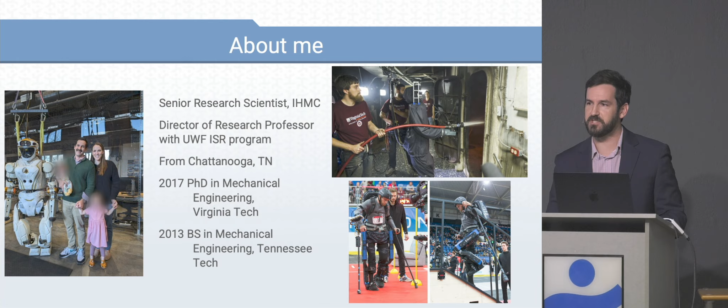And to go from that to where we're talking about today with humanoid robots doing commercialization, potentially being applied in all sorts of different ways throughout society - it's been really interesting to be able to do that, and so I think that gives me a little bit of a unique perspective to talk about some of these things.

But before I get going much further, I do also want to recognize one of the other excellent things about working at IHMC is the team that I get to work with. It's an honor to get to come to work every day and work alongside people that work incredibly hard, are really dedicated, and I get to take the spotlight in situations like this, so I want to make sure to give a little bit of that to them, because without them, none of the work that we do would be possible, and they also make being able to come to work every day fun.

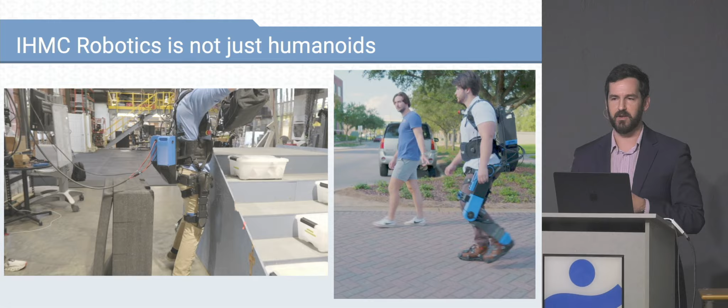It's also good to note, we do a lot of things in the robotics lab that aren't humanoids. So we do exoskeletons as well, we do drones, human-machine teaming, even quadrupeds. You're not really going to get to see very much of that today, but you can look at our YouTube channel, or come to our open house in April if you want to see more of these things in person and maybe interact with some of them.

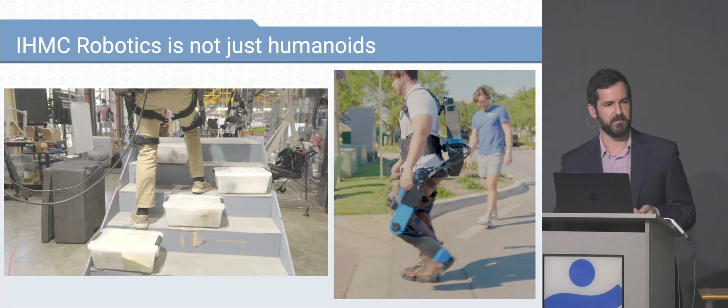But today we're really here to talk about humanoids. And for me, a lot of it is what is the motivating factor? It's that the robots that we have today, in a lot of cases that are actually deployed, just don't work in complex environments.

If I talk about different applications like emergency response, even soldiers, or even just manipulating operating panels, there's a lot of mobility challenges and other challenges for these robots to get there. They simply can't operate in these terrains, and that really limits their total application.

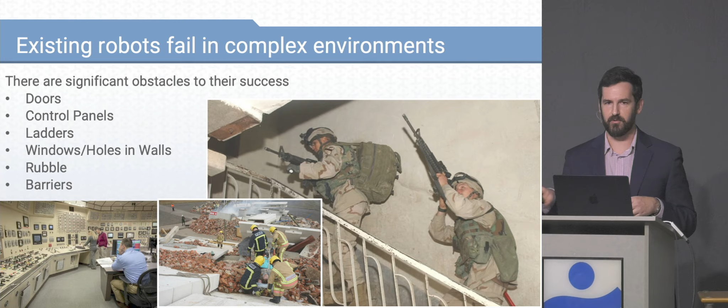And if I think about some of these obstacles, it's things like doors, control panels, ladders. A lot of these robots are built to do one or two things. Amazon warehouse robots are a great example of that - they can drive around the floor, and they do that very well, but they just don't scale to a lot of these other applications.

And that is really why humanoids. We have humans doing all of these tasks, and I want a robot that can go where people go and do what people do. And in a lot of cases, that necessitates a robot that looks somewhat like a person. The world that we've built is designed for people, by people.

A great example of that is the fact that the Americans with Disabilities Act exists. The ability for people that are wheelchair bound to be able to get around is only possible because we have the ADA, and even then it's still very limited as to the type of places they can reach. There's a lot of issues with this access that continue to be a problem, despite the great efforts we've made. So if I think about trying to extend robots into environments that are designed historically just for people, and have only been accessed by people, it's going to be a real challenge if I'm trying to take a traditional platform to do that.

We can highlight that simply by comparing. So we have our robot here on the left, Alex. Next to that we have a quadruped, Spot, made by Boston Dynamics. Then you have the robot you walked by on your way into the room here, T-Bot. And then there's the PackBot that gained popularity - one of the first mobile robots that made it out there.

If I look at these different platforms, talking about squeezing between a narrow space, a pretty big humanoid can do that because it can turn sideways. You're skinny where you need to be. But a quadruped needs to be pretty small, hip width. Your wheeled base and track base have to be quite small - it's really that width that limits them.

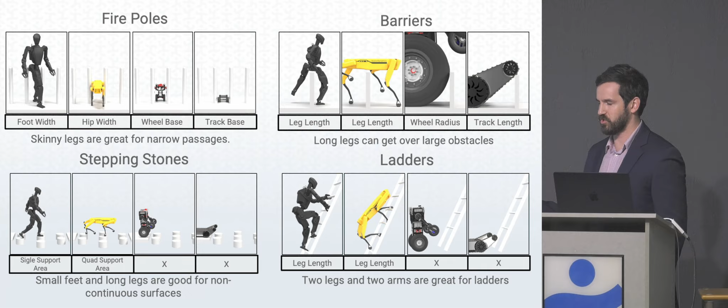But then there's some things you simply can't do with a wheel or track-based system - things like stepping stones or climbing ladders. You just can't do that. So if I want a robot that can go into a place that has that as a challenge, I really need something with legs.

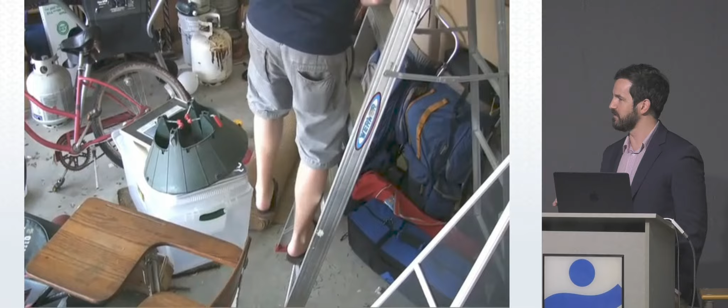I can take a video that was filmed in my former colleague's garage - we like to say this is like a disaster zone. You can see if I want someone to go in there and get an object out, he's squeezed between tight places, takes a big step over - never mind he's wearing flip-flops, that's probably questionable safety. He steps across, goes over a carpet, all to get a tennis racket.

While this may be a pretty trivial example, you can imagine a quadruped probably couldn't do this. I know a wheeled or tracked robot couldn't. Maybe I could fly a drone in, but that's going to be limited by however much it can lift, which isn't a whole lot. So you can see why, if I have these hard-to-reach places, I probably want something like a humanoid.

Now we can look back as to what funding got us to where we are today. A lot of it came from government funding - a lot of our investment in this research and development process came from government-funded research. It's important to recognize that. A lot of the innovations we have today were supported and made possible by government-sponsored research, and humanoids and quadrupeds are no exception.

You can trace this back - if you go into the IHMC lobby, we have an M2V2, that was around 2006 to 2008. But it really started to strike more high-speed progress when DARPA stepped in and started funding the Big Dog program - that's the quadruped from Boston Dynamics. Early day footage, you can still find it online, people shoving it on ice, doing all kinds of crazy stuff.

This just further increased. You had programs focused on carrying larger loads, like the LS3 program, which led to this huge quadruped. You had Petman, and then a really interesting one was the M3 challenge, which funded a couple of different teams including MIT - they focused on high-speed quadrupedal running, as well as IHMC, where we focused on bipedal running. That led to the Fast Runner robot, and we ended up having a Hex Runner, which somehow is making a resurgence on the internet from videos.

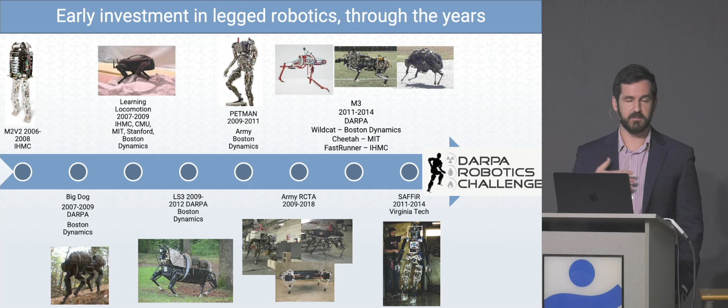But it is interesting because now humanoids aren't just research. We had all this early government investment in the research, but it's not just research anymore. Now there are a lot of startups. This obviously isn't an all-encompassing list. If I were to try and list all of the companies from China, it would probably be the rest of this presentation. But you have the high points like Boston Dynamics and Agility Robotics, and you have a lot more on this list as well.

A lot of this is not necessarily driven by the appeal of the mobility of these systems, but the big workspace. So you think about a humanoid, it can reach down low, it can pick something up off the ground, it can also reach up high. And if I'm thinking about a robot that can do that, that's genuinely challenging for a lot of systems. So humanoids are really good for that. But most of the applications today, which we'll kind of walk through in a second, are really focused on more simple, repetitive tasks rather than this complex thing that we're really hoping humanoids can fulfill.

It's also worth noting that, as far as I'm aware, the only real company that I think is delivering value to customers today is Agility Robotics. You have a lot of other companies that have raised a lot of money, they're talking about deploying robots, and I think a lot of them are probably on the cusp of it. But the only one that's currently sold and being utilized as part of general operations is Agility.

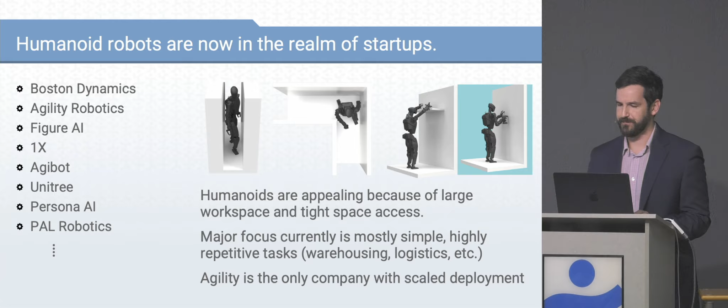Which is a great segue, because if we start talking about potential applications, one of them could be humanoids for logistics. So here's Agility in one of their early deployments at an Amazon fulfillment center. A lot of it was taking these empty totes, moving them back onto a conveyor belt so that it can go back and get refilled by, I guess they're called fulfillment specialists there.

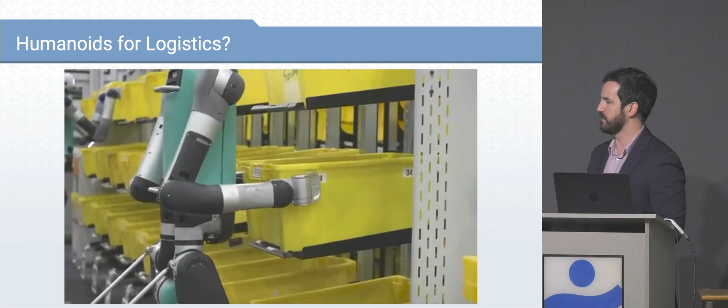And this is an interesting application. I think that there are some questions that could be drawn as to whether or not this is the right task for a humanoid. It's workspace challenged, sure, but probably not really a mobility challenge. Maybe there's some question of why legs, but there's a lot of potential argument there for the efficiency, the availability of work, the ability to move through constrained spaces.

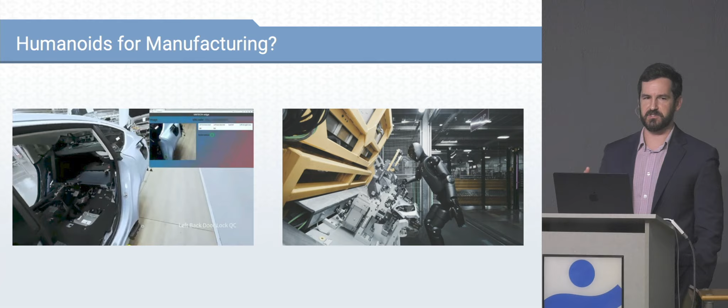And that kind of leads us into some of the arguments being made for manufacturing. This is interesting because a lot of what you see robots being targeted for is manufacturing in automobiles. I don't fully understand why automobiles has captured the imagination so much, but that's mainly the thing that people are talking about. You have, on the right, Figure AI out of California.

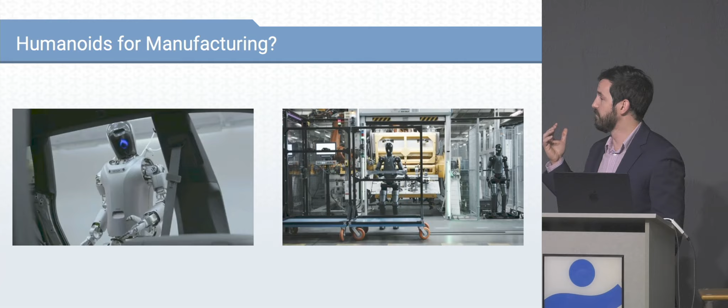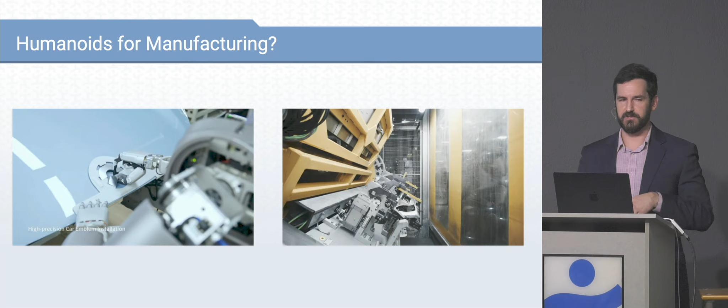They're a startup, kind of one of the most well-funded startups in this space at this point. But they just started a handful of years ago, and here they're working at a BMW factory in, I think, South Carolina. They're doing one part of the process where it's not time constrained, so it's not the bottleneck, but they're moving a part from one place to another, and the work cell closes, and then the task goes. This has historically been done by people.

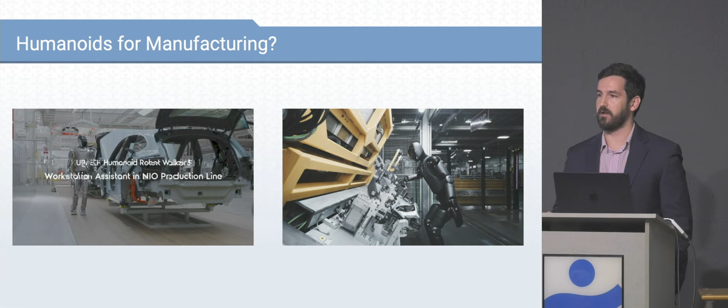On the left, you have a robot doing kind of the finishing touches and inspection in a facility in China. This is UBTech. There's a couple of different companies in China that are also targeting this same type of model.

One of the other ones that's a little more interesting, and is starting to gain a little more common ground on what these companies are targeting, is for the home. This is a company originally out of Moss, Norway, called 1X. They've recently relocated to the Bay Area, and this is the robot Neo in the home. I think that this is an interesting one.

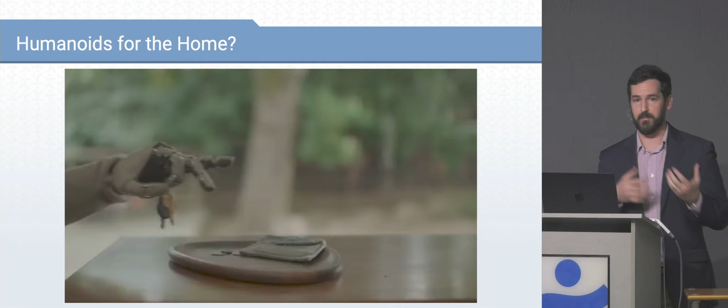You could be pessimistic and say that this is one of the only ways companies can justify the valuations they need to raise the capital to build the production lines, because if you talk about the total addressable market of the home, it's huge.

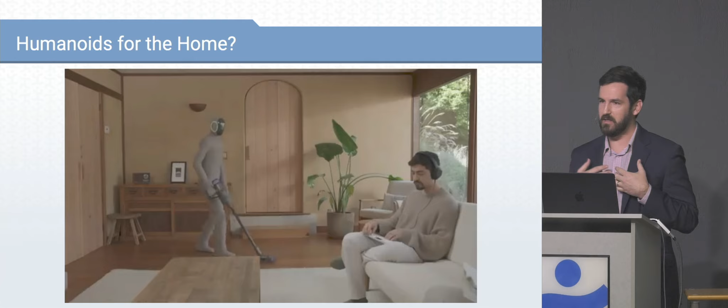But I think there's also a lot of challenges with this. There's the liability component—what happens when the robot falls on someone? Who's in trouble? Then there's the practical component. If I have something that can wash a dish a whole lot better than me, that's the dishwasher. I don't need a robot to do that. We'll actually touch on that a bit here in a few minutes. But whether or not this is a great application, I think is up for debate.

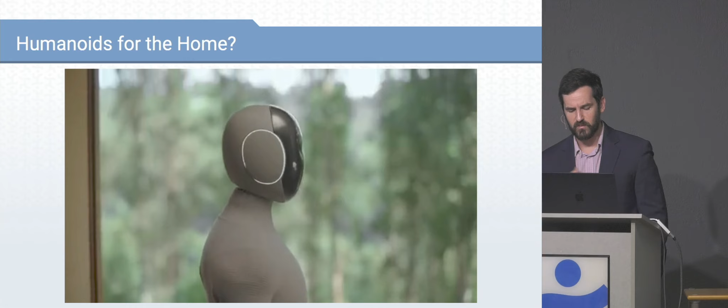It's definitely one that captures the imagination, though, because the idea is that you can have access to home care, support, companionship, potentially if you're unable to have additional people come into your home often. There's a lot of potential justifications for it.

But we talk about some of these things and say, well, why humanoids? So I can be pessimistic about it, I can be the naysayer, but I can also play the other side: if you have a general purpose robot that can do all the things a person can do, that's pretty great because people can do all kinds of things. It may not be the best suited platform for that, but if I have to maintain a production line for one robot, and it can do 1,000 things, that's a whole lot better than maintaining a production line for 1,000 robots that can each do one thing.

It allows your economies of scale to kick in. It means you don't have to set up production and supply chain for all these different things. It means that if I have improvements on one platform, it can get distributed across the entire fleet. There's a lot of arguments that make the case for why you should use these robots.

I think it's up in the air as to whether or not that's the right answer, and I think to some extent time will tell. In a lot of cases it could be that this is a stopgap solution. We may introduce these types of robots to bolster automation immediately, but in the long run we replace them with more traditional manufacturing that can do higher throughput, because humans and humanoid robots likewise are going to be limited by the speed in which they can operate. Whereas if you think about a Coca-Cola bottling company, they're not bottling those by hand for a reason.

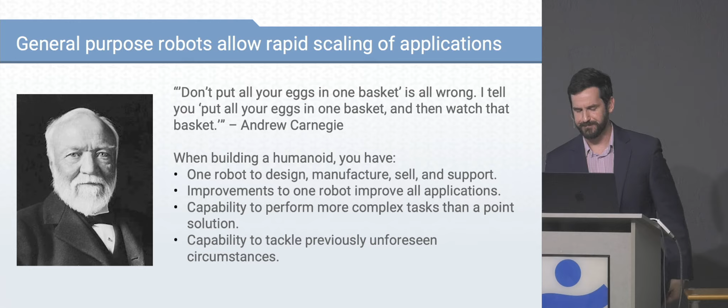But beyond the applications, I think it's important to look at just what goes into building these robots. This is the thing I can probably speak best to. I'm not a venture investor, I'm not leading a startup or anything like that, so talking about the economics of it may not necessarily be my lane, as I'm sure I might hear about online. But I can talk a lot about the design of these systems.

And beyond just the hardware design, you have all these hardware challenges of how do you pick out sensors, how do you design structure, your actuators that make it move. There's all kinds of things—that's the readily apparent one, you look at the robot and that's the thing that's most obvious. But there's also, well, how do you make the thing move from the algorithm's perspective? What is controlling the desired motions, the behaviors and the autonomy of it? If I need to go in and tell it what to do myself, how can I teleoperate it? There's been a lot of work on that over the years. And then there's the user interface—how do you actually interface with the robot? Is it verbal? Is it via a computer? Is it virtual reality? What are the different things there? All of these are things you have to consider when you are building a humanoid robot.

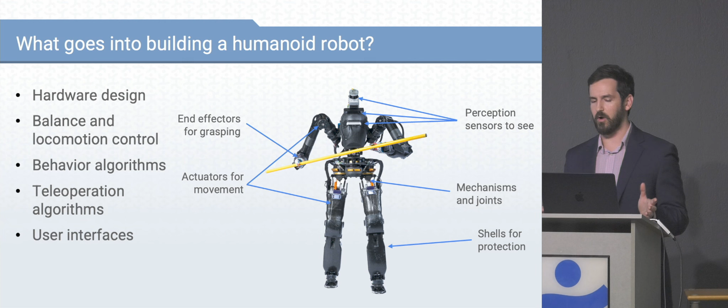And first is actuation. If I talk about actuation for a robotic system, this is a particularly challenging part. You really want your motors to be strong, you want them to be low weight—I want my whole platform to be light—but they also have to be fast. These are all pretty bounded things; we can do that, we've done that for a long time.

What's a little bit harder is they want to be compliant. What I mean by that is if I physically interact with this system, it should adjust. Traditional manipulators are strong and rigid—if they hit something, they break the thing that they hit.

The thing that's really hard about this, though, human muscle is great at all of this. Human muscle is powerful, it's compact, it can move fast, and it's very compliant. It's also squishy, which is nice for getting around joints. Actuators aren't that. So that does place a tall order if we want to build a robot around it.

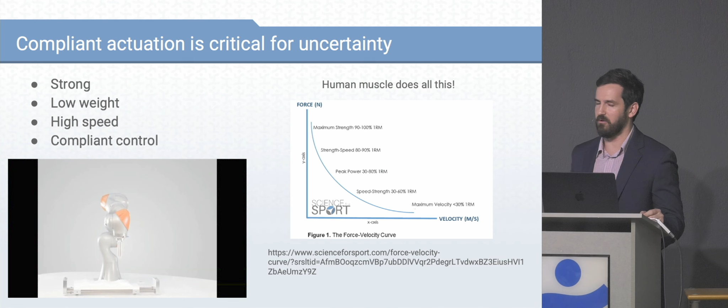We've done this in a number of ways over the years. Kind of the first way that people were really able to achieve compliant control, series elastic actuation. So I know that's a big word. What that means is that I have a motor connected to a transmission. That can be like a screw or it can be a gearbox. And then the part that makes it series elastic is that I then put a spring between the transmission and the output with the world. I put a compliant member, I have an elastic member in series with the motor.

And this is great because now I've decoupled the motor motion from the output motion. So if I do something like stomp on the ground, it doesn't load all the gear teeth in my actuator and break it. It also allows me to control those interaction forces. All I have to do is control how much I'm deflecting that spring in order to get that interaction.

And we used this on the robot M2V2. I say we generously, I was not here at the time. But I did use it on the robot that I worked on at Virginia Tech. So this is kind of the historical way that people achieved compliant actuation.

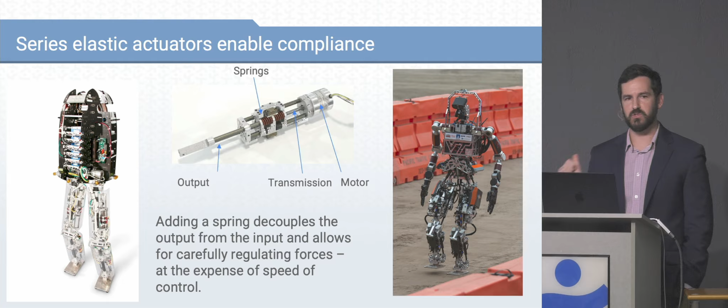But it comes at a cost. That's why it's a historical way. They're relatively slow. And one of the things that we care about with balance is we want high frequency control. So I want to be able to control it rapidly. And you just can't do that very well with series elastic actuators.

So hydraulics are just like what you see in construction equipment. You're putting fluid in, and you're controlling that fluid flow, high-pressure fluid, with a valve, and that goes into chambers on these pistons, and it will control the way they move.

But this comes at the cost. Hydraulics are not efficient. So if I want low force, and I'm taking this high pressure fluid, and I'm putting it into a chamber, and I want a low output force, I have to take all of that energy stored in that high pressure fluid, and I have to make it go somewhere else. Unfortunately, my make it go somewhere else isn't back into my fluid line, it is into the form of heat that's just lost. So it's really, really inefficient to use hydraulics in a lot of cases.

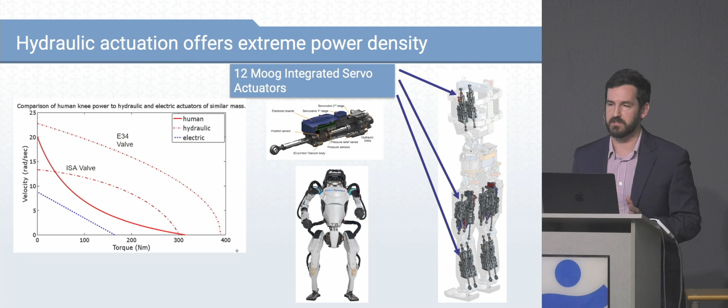But you can do some pretty awesome things. More recently, what we've kind of converged to as a field is what's called direct drive actuation. So this is, instead of caring about adding fancy springs on the output or fancy sensors to measure your forces, you just connect a motor to a gearbox that has a low gear reduction, and you're done. And this actually works really, really well. This is a technique that was first really tried out by MIT within the last handful of years on their cheetah robots.

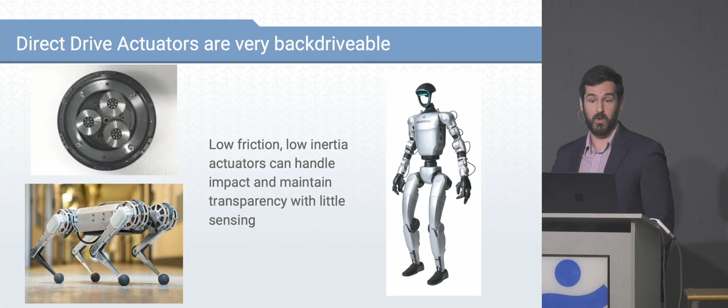And I'll skip to the end of the story on Nadia. We didn't quite get there. But we got close in some of the areas. We got human-level range of motion, human-level power. We didn't quite get the mass or volume of it, though. And we didn't quite get the robustness either. But this is a really hard challenge.

We started on this in 2019, but a lot of this is an exercise in compromise. I think most of your robots, you can get this high level of performance, but you're going to have limited runtime. If I can get a really high-performant robot like the G1 that I showed just a second ago, that can operate for about 30 minutes. So that's not great - not really going to go into a production line, but that's better than the hydraulic Atlas.

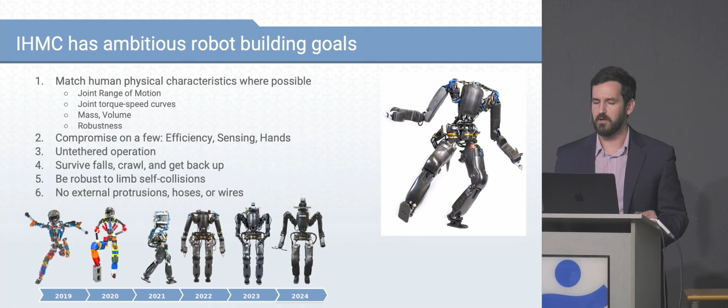So if I'm talking about how do I design to meet some of these requirements, one of the first steps is mechanisms. So if I want to take my linear pistons, my hydraulic pistons, and put them in a robot, that requires a lot of really careful engineering. If I want to have these legs pitch all the way up, get that flexion and extension out of them, I have to use a lot of mechanisms.

And so we used what was called this dual 4-bar. A simple 4-bar is one set of 4 linkages, and we used 2 of them, which is why it's a dual 4-bar. And then each of those is powered by a hydraulic piston. We were able to get really great performance out of this, really great range of motion. But as you can tell, that's pretty complicated, which comes with a lot of challenges. So it's not necessarily the best path forward in the long run.

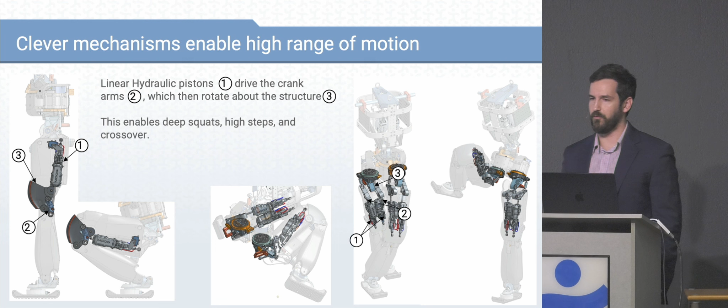Another thing you need to consider when you're designing these humanoid robots is the structure. So earlier I showed pictures of Nadia. We used carbon fiber on that. If you asked me 15 years ago, 20 years ago, if carbon fiber would be a good choice for a robot, I'd probably say no. At the time, you didn't have a lot of examples of people using carbon on durable systems. You did on high performance, so you'd see it in kind of aerospace type domains, but for more durable systems, it just wasn't quite used like that.

And then people started using it in downhill mountain biking, which if you know much about downhill mountain biking, those things take a beating. And part of this is enabled by some of the things that you can do with carbon fiber in general. So carbon fiber is typically made with interweaving strands of carbon. One of the great things that you can do is you can actually take it and reinforce it with unidirectional carbon. So instead of weaving it in, you can just say, I really want it to be stiff in this direction right now.

And that's what we did on the shells here. So we were able to achieve this kind of exostructure that was really, really strong, really, really stiff, and still really light by optimizing those designs. They even do this in some bicycles, so it's able to actually isolate vibrations on the bicycle just by the design of the frame itself.

Now, the challenge of this is I don't want a robot that is shelled entirely in carbon fiber if I'm going to be doing this primarily for physical interaction with people.

So if I'm making a robot like Neo, that we said earlier, trying to go into the home and interact with people, I don't want it to be rigid or really stiff on the outside. So what you're doing in your design is heavily dictated by your goals.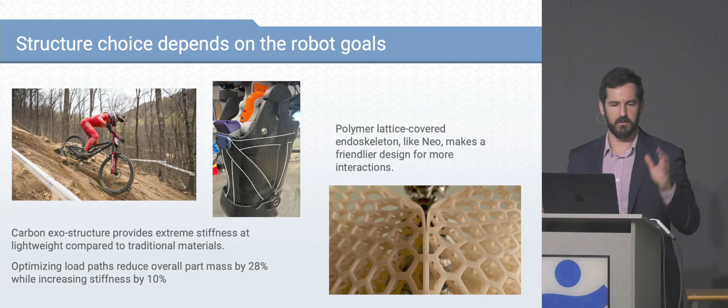So what 1X actually did on Neo, they have these great videos on the internet highlighting their design. They have this polymer lattice structure that's really cool, makes it soft, and they coat the whole thing in fabric. But that means it's probably not going to do too well in a heavy industry manufacturing setting. So you don't have a robot design that will work in both industry or harder environments and a home environment. You do have to choose.

Then when I think back, we're going to tie it to hydraulics. It's not just pistons - we talked a lot about the pistons, but there's a thing that makes it go. When we wanted to have Nadia go outside, we had made this giant backpack that takes all of this stuff that actually powers it. You have to have a pump, a motor for the pump, a thing that stores all the fluid, another thing called an accumulator that pressurizes the whole system, and a radiator to handle all that heat you're generating.

On Nadia, we did a good job on the first pass, but we still needed a lot more pressure out of it. This thing was heavy, you can look at it and tell. The best in class of this that's ever really been achieved was 5 kilograms per 5 kilowatts, which is really impressive, but didn't include the radiator weight and is still stuff that I really don't want to deal with on my robot. So to that end, we kind of moved away from hydraulics.

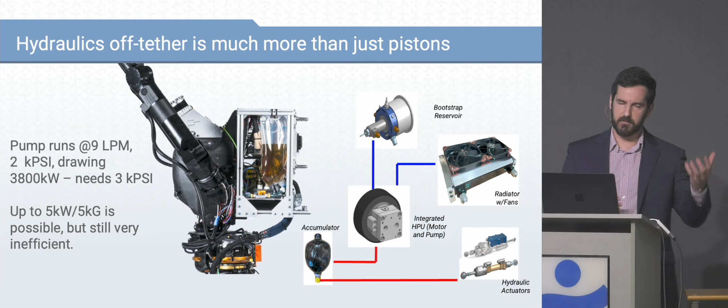I talked about how we started to move to quasi-direct drive on everything, which is really important because if I take these rotary joints, I can get a really high range of motion, I have high power to weight, and I can also just buy things off the shelf. They don't really make very many hydraulic robots, so most of that stuff is custom. And I don't have to deal with that giant hydraulic power system or all the hoses I have to route to my pistons.

So you're able to make much more compact, much neater, much more presentable designs that look less like something a mad scientist came up with in a lab, which is great and actually led to the design of our robot there on the left, Alex.

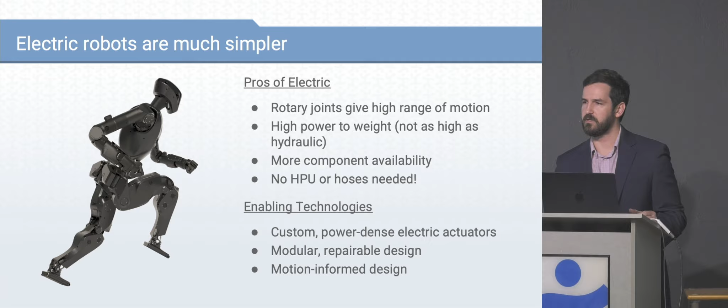The core part of Alex, again keeping on this theme of actuation - for us, we really focused on quasi-direct drives, doing a different take than a lot of other people do. We wanted to use a different transmission called a cycloid. The reason being, on a traditional planetary gear, you have all these interlocking teeth rubbing together, causing losses, introducing friction and backlash, which makes it harder for control. Friction means inefficiencies, and it also makes your ability to do higher reductions worse, so your whole actuator operates less efficiently.

On a cycloid, though, I can take each of those contacts and put a bearing on it, which you see here on the right. If I have a bearing, that means I'm not rubbing - the whole surface rolls. We took one of these actuators, pretty big, and gave it to one of the engineers, had his son come in, and he was able to just backdrive it by hand, which is almost unheard of for things of that high of power. Really, really low backdriving force, which means you get efficiency, your transmissions hold up longer because they don't rub and wear out, and your whole system can operate for a longer period of time.

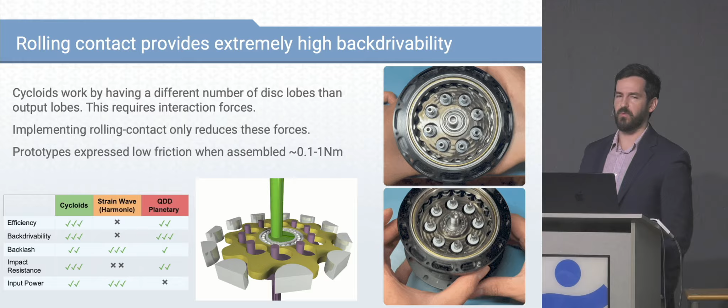But beyond just the actuators, if you're designing a robot, it's not just about the motors, it's about what the robot can do. For that, you really want to focus on workspace. We talked earlier about how a lot of people care about these robots because they have these big workspaces. Well, how do you maximize it? What are the tools that we use as roboticists to do this?

A big part of what we do is these workspace analysis things. It's a pretty diagram, which I'll give it that, but what does it mean? I like to use heat maps, which is a questionable decision since I'm also colorblind.

If I look at this figure, the way I interpret it is, the further I go to the right on my color gauge—I think it's blue—the more poses my hand can achieve, which means the more ways I can grab something at that location. If I can only grab something from one configuration, I can't do much with it. So I want that thing to be most dense, to have the most poses, the most blue, in front of the robot, so I can also grab it with both hands.

You'd think this is obvious, but it's not often done. For example, a robot we used to work with, Valkyrie out of NASA Johnson Space Center—they designed the robot, they were very rushed at the time, so I'm not going to be critical. It was part of the DRC, we didn't have all these tools. The workspace is pretty much to the side of the robot, so the best way to interact with the environment is to stand sideways to it, turn your head, and grab something. It's not really ideal if you want it to operate like a person, or if the task takes two hands.

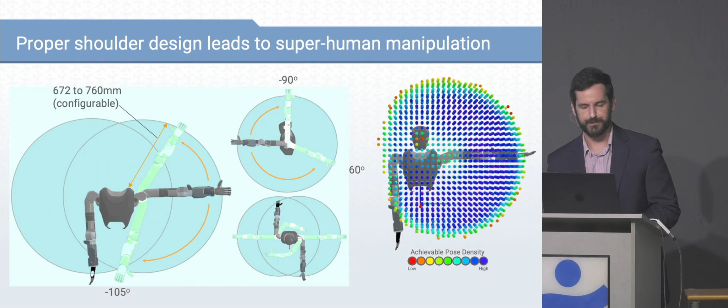But it goes beyond just the arms, it's also the legs—legged locomotion, legged robotics. This is something we care a lot about at IHMC, and I think the industry should too, but doesn't always: the natural dynamics of the system. If I'm swinging my leg, that has dynamics—what are the motions, the forces required for it to move? The more mass you have towards the foot, the more distal the mass is, the higher the torques you need at the hip. The bigger the actuator has to be, the less efficient the whole system is. This makes sense—if you've ever worn ankle weights and gone on a walk, you can tell it matters a lot. So you really want to reduce what we call distal mass.

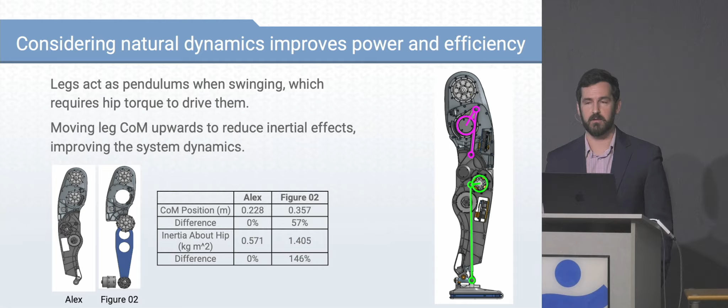It's interesting because you can actually go out—and I feel somewhat bad about this, I usually reference Figure, we were talking about startups earlier—their ankle design is the exact opposite of what I'd want to do, where they put as much mass towards the foot as they really could in that design approach. It's easier to do that, but it makes for a less performant system. That maybe doesn't matter for their goals, but if you're trying to make a robot that can move through the environment efficiently and dynamically, it matters a lot, and that's what we're trying to do.

Part of that is also adding a battery. I don't even want to show the picture of Nadia where we put a battery on the back of that giant backpack pump, because now the thing's going to fall over backwards. But we designed Alex to be able to incorporate a battery directly, and there are a lot of different ways of doing this. Some companies design them completely integrated—Figure does that, they just use inductive charging, they don't have a swappable battery. But in my opinion, the swappable battery is really convenient, because I can pop it out, put a new one in, and keep going. Or, like some robot companies are doing, the robot itself can take the battery out and put a new one in.

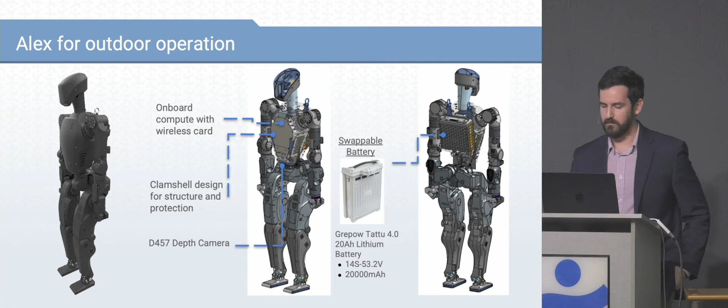When I put all these things together, I can make robots like Alex. This is us walking at the tech park back in November. It was the first time we've taken a robot out of IHMC in about 10 years, since the DRC—the first time we've ever taken a robot built by IHMC out of IHMC. You could also make the argument it's one of the only times the tech park has been used for much tech.

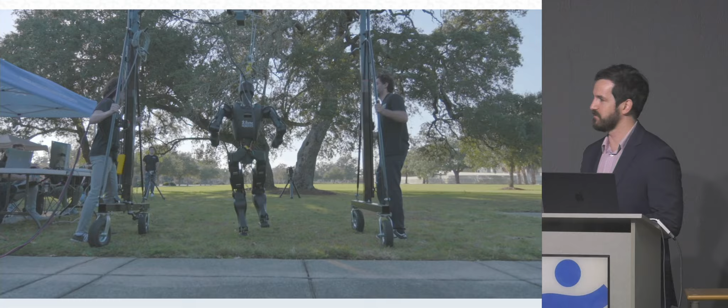But the question is then, how do we do this? We've used a lot of what we call simple models at IHMC. This is one of the ways that everybody used to do it, and it's one of the ways that we've advocated for pretty strongly for a long time. We're starting to relax on that, which I'll talk about in a minute.

But the great thing about walking is you can describe it in really easy ways. Basically, it's an inverted pendulum. So if you've ever tried to balance a broomstick on your hand, that's pretty much how robots balance. You have a center of mass at the top, so basically where all the mass is on the robot. You also call it a center of gravity.

And then you have a center of pressure, so it's where you feel all the forces going through on your hand. And if you think about balancing, as the pendulum, as the broomstick starts to tip, you move your hand. Right? Well, that's the same thing you do as a person. If I lean forward, if I move my center of mass forward, my weight shifts in my feet, which moves my center of pressure towards my toes, moves towards my heels and the back. So that's standing balance. Well, walking is just moving that from one location to the other. You're just moving your weight distribution, your center of pressure, around to manipulate your center of mass.

And the great thing about using these reduced order models or these simplified models is that I can use them in all kinds of different environments. There are those that will argue that they don't apply to more complex terrain, in which we make some simplifying assumptions that relaxes that, but you can still use them, and we've demonstrated that at IHMC over the years.

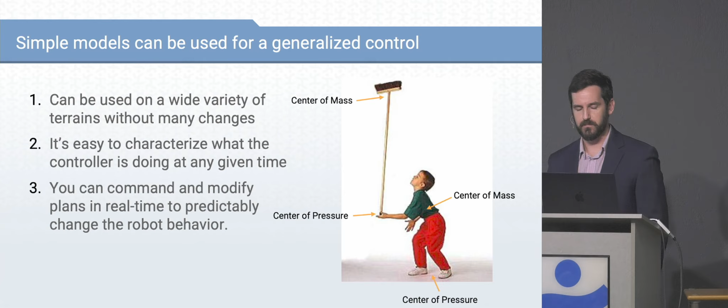And the great thing, this enables robust walking. This was me in 2022, I think it was, without the beard, so more like what I look like in those pictures. I joked that this was my mask, my disguise, so that nobody would ambush me before the talk. And I was excited because this was the first time I worked with a robot that was fast enough for me to actually do push recovery.

I worked with Atlas, a different Atlas before this. It was a giant, slow robot. You couldn't do this. And then I worked before that with the one from Virginia Tech, and it was also slow. So we couldn't really do this kind of testing of these models, and they work. And we use it on all kinds of different terrain. This is it picking the feet very carefully and then moving them to maintain balance.

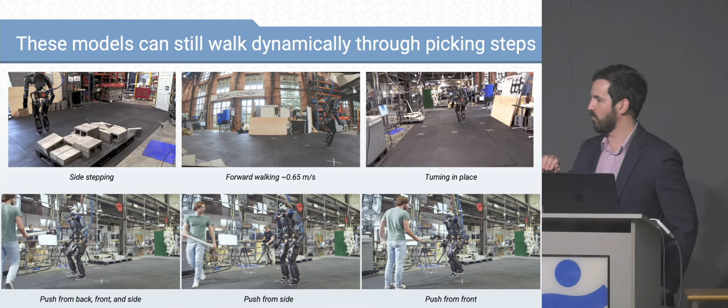You can do the same thing where you just say, walk at this speed. You can make it more dynamic. And there are examples of robots walking even more dynamically than this. But this is my presentation, so I'm going to show my robot.

And so these work very, very well in a lot of different environments. In fact, you can even do things like applying external forces on the world, using your simple models. So if I want to, let's say, gain access to a building, let's say the building's on fire, but the door's locked. I'm a fireman, I need to get in to rescue some people. I'm going to have to kick the door in.

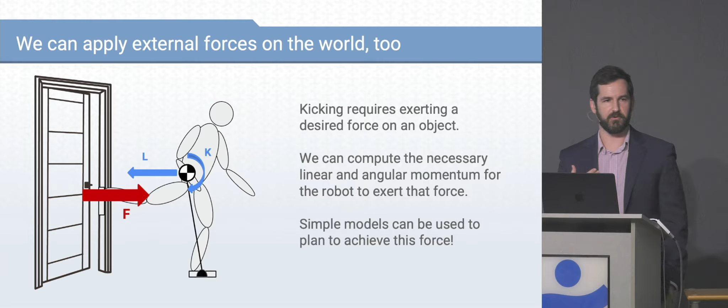Well, I can do that with a simple model. I can say, here's the force that I need to exert on the door. Let me back out my center of mass trajectory in order to do that, and I can control to do it. And I'm not just saying that you can do this, we've actually done it.

And this was probably the most fun day that I've had at work before, where we set up a door. This is an actual locked door. The robot sees where the door is, knows where it needs to stand to kick the door in, and positions itself and then does the kick.

And this is an actual locked door, and it's actually kicking it in, which you'll see here in just a second. You can see the hasp on the door latch flying off. Here's where it is. You'll see it kind of go flying. And I guess I added the cinder blocks for more dramatic effect, but than anything else.

But this was also a day where I learned if you're ever going to do this, get solid core doors. The first time we did it, the door was in half by the end of the day.

But a lot of these are kind of contrived scenarios. Walking on flat ground, sure, I can do really aggressive stuff with simple models. Even walking on some more adjustable terrain, I can do some pretty impressive stuff. But you don't get quite that level of robustness.

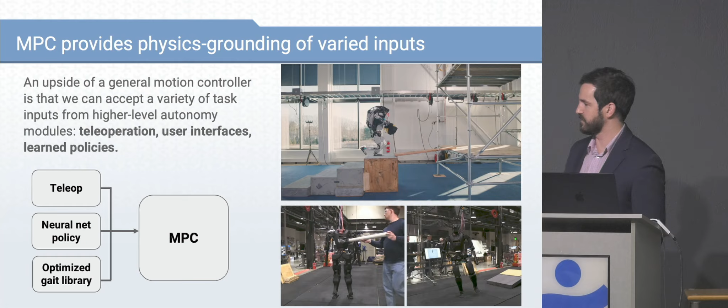But this model predictive control that we call trajectory optimization, it's great, though, because it obeys the physics of the system. It will give you an output that is bounded by the physics that you told it. So here is an example: a lot of the videos with Atlas that we showed use this MPC approach, and it will execute the outputs, where you can tell it a lot of different things. Here on the bottom is us doing some earlier MPC work on Alex.

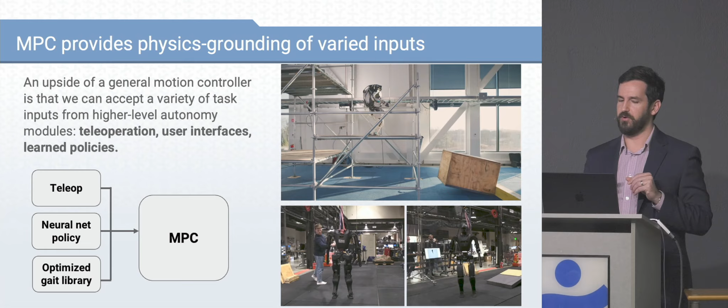And the great thing about this is you can take all these different inputs. It could be teleoperation input, it could be neural network policies like this learning that we're talking about, or it can be a gait library, and it will tell the robot what to do, and it makes sure that it obeys those physics.

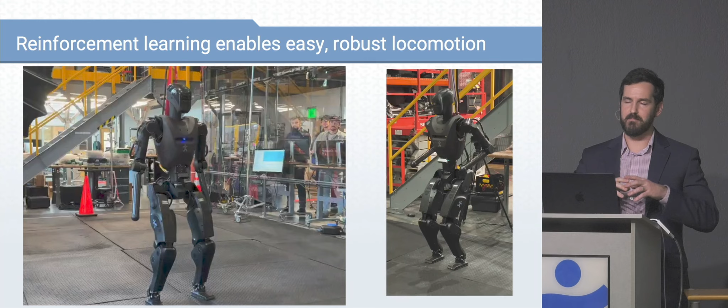Whereas reinforcement learning, honestly, is a lot simpler in a lot of ways. We worked on this for a little bit, but I can download some open source code, and I can get my robot Alex to walk with some tuning. But I don't have to write this massive amount of code. You can do this in a couple hundred lines of software that, honestly, at this point, you can probably ask some LLM to write for you. As opposed to the MPC libraries we were talking about, that's tens of thousands of lines of code.

You get a lot less flexibility with it because it's only based on its past experiences, but it also introduces a lot less room for error when I have less code there. However, like I said, it's very dependent upon its past experiences. So if I don't have a lot of experiences walking slowly, what you can get is these results like here on the right, where it looks horrible when I'm trying to tell it to walk slowly. It starts to look a little bit better as it gets towards the end.

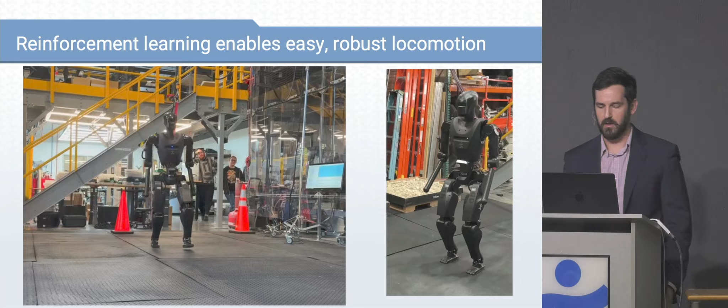It starts getting faster, but it's really heavily based on the experiences it has. Still, you can get some really incredible results. I don't advocate for kicking your robots like this, and I think this is very locomotion-dependent, but you can get really robust movements out of it. It's basically switching between two things: do the stance routine, and if you fall, stand back up. That's all that's going on, and it's able to recover incredibly impressively based on having been trained on that.

But you don't get a lot of flexibility. So this is one of the things we've spent a lot of time working on: mechanisms for getting high flexibility in unknown environments. Here I have my operator, John, in the background. You can't see him, but he's in a VR headset controlling the robot. He sees what the robot sees, and as he moves his hands, the robot does that. He goes over, picks up this pipe, and pops open the barrel, which is something your robot wouldn't figure out based on past experiences because it doesn't have that as an experience. But a human in the loop can look around, see tools, identify how to use them, and do that on the fly, which is important if you want robots in high-stakes tasks like, in this case, bomb disposal.

So if I don't want to rely on something with that level of uncertainty, I want that tight control. One thing we learned as an aside: make sure to tell your cleaning staff you're going to have a fake pipe bomb, because if they walk in and see that sitting on the stairs, you get some phone calls.

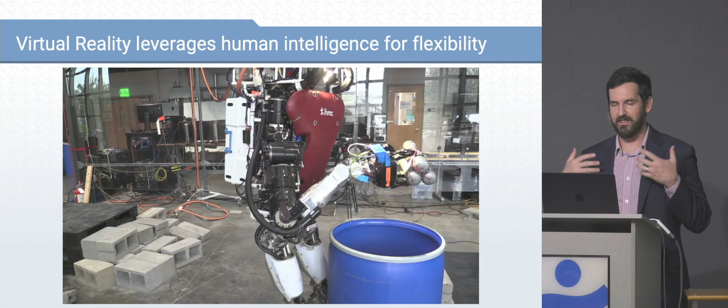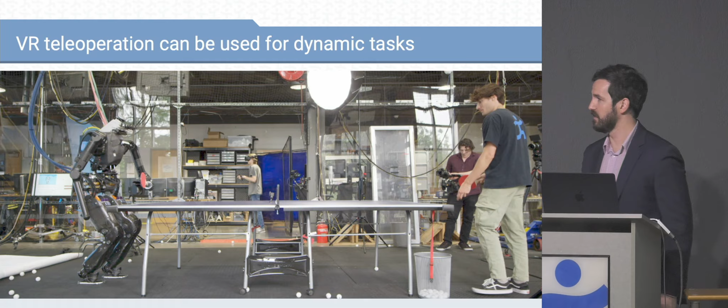But VR isn't just for these relatively slow tasks like you saw on Atlas. You can also do things like ping pong. Here we have Luigi Penco, one of our research scientists, playing ping pong against Dexton Anderson, one of our other researchers in the background, who you can see wearing the headset. This introduces challenges: you've got to get over the latency, so you have to get the data to the user, he has to figure out what's going on, where the ping pong ball is, and then tell the robot what to do, and it has to respond quickly enough for this to be effective.

That's one reason we liked this as a challenge, and you can actually do this with VR as well. But beyond that, if I think about mobility, a lot of the situations we've been trying to put our robots in involve complex terrain over the years. For Atlas, the way we did this, you'd have this one LiDAR on the head—a 20-year-old sensor at this point—and it would build up a model of the environment, then you could plan the footsteps the robot would take over that environment, which works really, really well. As you can see, we have the robot here in preparation for an open house, going up and down for about 4 hours. A person just says climb to the top, it figures out the steps, as you can see on the bottom left, and the robot does it.

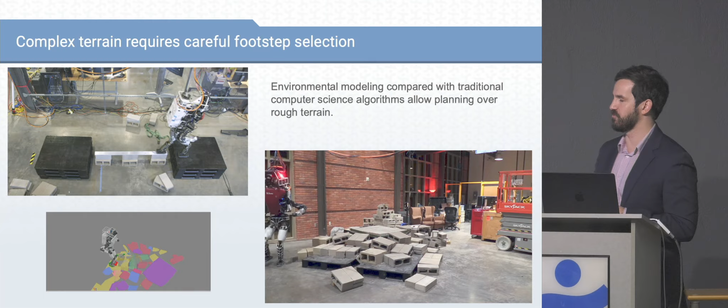But the problem with this is it's not very adaptable. If one of these cinder blocks drifted while the robot was in the middle of going up the steps, it would keep placing a step there and fall. So we spent a lot of time on this—one of the great things GPUs have enabled is much faster computation. Here's Nadia actually going upstairs, and you can see it's computing these steps as it goes, and it's also mapping the environment as it goes, not waiting for that beforehand.

So it's this idea of modeling the world around it for these robots to walk over, and this is still using those classic simple model approaches, and they work really well. Here we're just telling the robot to walk forward, and when it gets to the top, we tell it to turn right, and it goes over the cinder blocks. This is at the open house in 2024, I think, so we did this then, and you can get really great approaches—it's still not very fast, though, unfortunately.

I talked earlier about the DARPA Robotics Challenge and how I think it was a really great example of humanoid robots. But one of the things that was a little disappointing was how slow everything was. They did some benchmarking, and a person could do the tasks relatively easily in about 5 to 10 minutes. One person saw how fast they could do it, and it was only about 3.

It took IHMC like 45 minutes, somewhere around there. Part of that is because of the amount of time spent planning. We showed a second ago you can speed up locomotion by continuously planning. The same thing extends to all these behaviors. If I look at the statistics, I spent two-thirds of my time with the robot standing there doing nothing, while the operators are behind the scenes frantically trying to figure out what to do. So the idea is, how can I introduce autonomy to start speeding up the system?

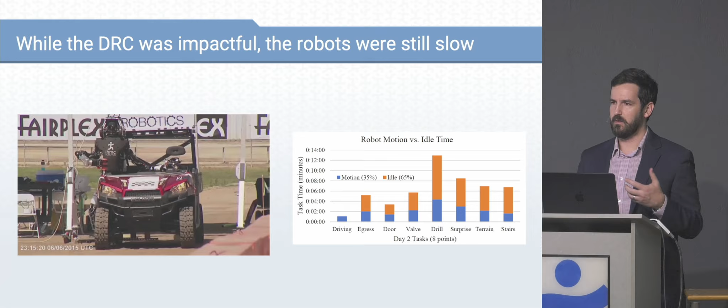This is something people have been working on for a while. Our initial approach was, what if we have an operator in the loop and make them a critical part of the decision-making process?

So that's what you see here. We have John again, John Carff. If you're familiar, there's 10 Carffs at IHMC at this point, and he's actually one of the longest employed people in the robot lab. They've been a cornerstone of IHMC, and I hope they will continue to do so in the future.

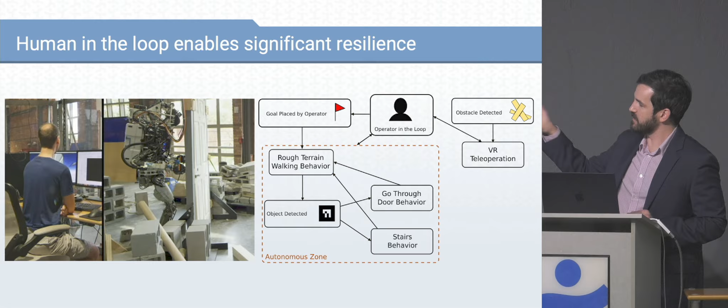He's kind of dictating the behaviors whenever the robot kicks out of its autonomy part. So I look, and this works pretty well.

So here I have Atlas. I told it to walk forward. Then it sees a door. We get to cheat here and use a QR code-like thing called an ArUco marker. It sees the door and says, hey, should I open that? John clicks yes, open the door and go through. The robot goes through and keeps exploring.

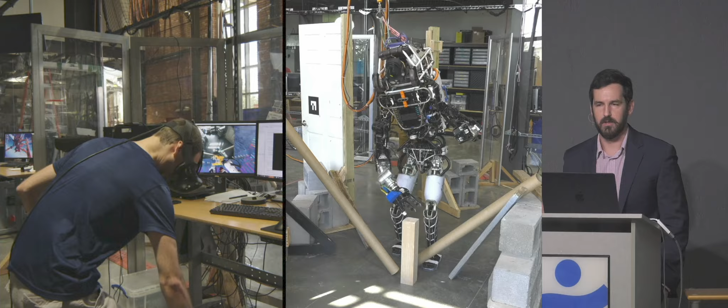It sees this debris and says, hey, I don't know what to do. So John jumps in with VR and is able to move these things out of the way. This is what I'm talking about earlier with leveraging human cognition. I don't have to have a fancy planning algorithm to do this. Importantly, the planning algorithm might have failed right there, where the robot thought it was going to do a good job and didn't, so he had to recover. Then you go through and continue the routine.

But this doesn't scale super well. I had this kind of rigid autonomy architecture that we showed we were trying to execute. So what other things can you use? If I want to build higher routines, more autonomy, what can you use?

Well, we like behavior trees for that in a lot of ways. Behavior trees were invented by a researcher from MIT, formerly named Rodney Brooks. He also went on to found iRobot, who makes a lot of vacuums, as you've probably heard of them, and then Rethink Robotics and a lot of other robotics companies, also after directing an entire department at MIT. So he knows what he's talking about.

The great thing about behavior trees is it allows you to nest this structure. So at the end, the leaves of the tree, as you will, are these little actions, like turn a handle with your hand. I tell a right hand motion what to do. Well, I can compose those up the tree. So here I have a door opening one: this one is turn the hand, and this one is reach with your left hand to the panel. Well, that's the open door portion of it.

Before that, I need to reach for the handle, and before that, I need to walk to the door. So you can compose up as you go, and each of these is a different node. The great thing is I can nest these together, so if I have this, I can call this my door opening behavior in my behavior tree. If I want an explore room behavior, I can now have a lot of these composed individually to have this whole routine, and it allows it to be this modular and scalable system.

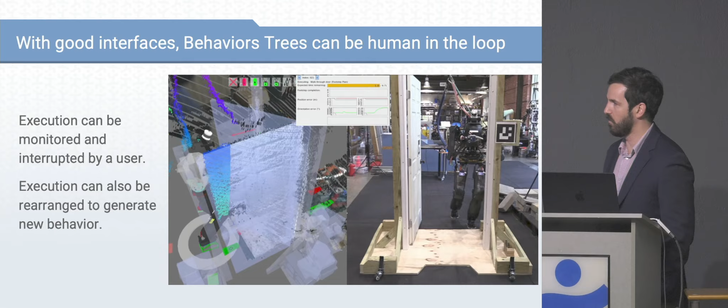So how do I make it such that that doesn't mean the whole task is over? Here you can see I can actually look at the nodes being executed in my user interface. It's a lot, I'll tell you that much. But you can see the nodes being executed, and kind of see the motions the robot's going to try before it starts them. Let's see if I can get it to play again.

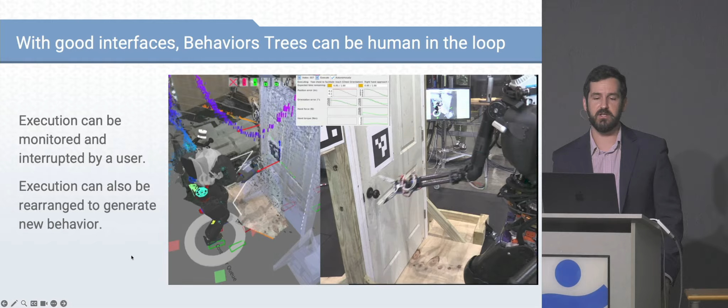That allows me to jump in whenever things are going wrong, and importantly, I can even change the motions on the fly. If I'm relying on past experiences, like a trained policy, I can't do that. But people are still using learning more now for this kind of thing.

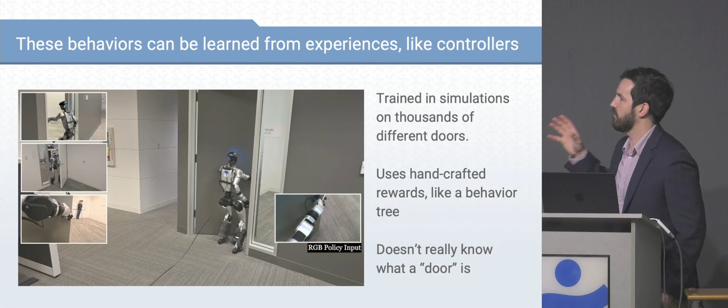So here's an example: they took a robot and put it in a simulation environment. The great thing about this is they were able to vary it over thousands of different types of doors, constructing a virtual world that just consists of thousands of doors. And then they give the robot rewards as it goes through this.

And it learns to open the door. The problem is the way you get this to work, you basically encode a behavior tree into the reward structure. So it's not entirely different. But the other thing is, I'd argue, this doesn't actually know what a door is. It knows that thing in front of me, I should open and go through it. That's all it knows, which means it can't really do a whole lot else.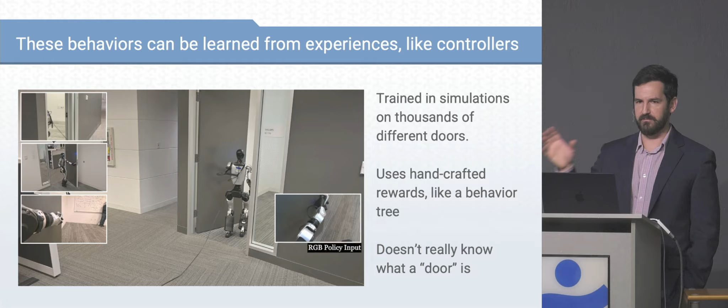It doesn't really have a semantic understanding of the world around it, so it can't really do anything else with a door. It can't close it necessarily, can't hold the door open or anything like that. But learning shows a lot of promise on understanding what things are based on these past experiences.

So computer vision is one of the places that machine learning has made the biggest, inarguable impact. Part of that is because it's really hard to describe what an image is. Like if you were to say this is an image, well, how do you do that? So this is where computer vision has done a really good job.

And here we can actually take these models and fine-tune them, because there's no way I'm going to get a pre-trained model off the internet that knows my barricade that we cut in half with a Sawzall is a barricade. So I'm able to take that, not start over, but give it this data and be able to use it. And when I add that to these behaviors, you can do some pretty cool things.

So here's Nadia two years ago, where we said, hey, you need to go find the program manager in this building. We took a picture of our program manager, superimposed it on the body of a Marine in uniform, and said go find him. And the robot knows, hey, if there's an obstacle in the way of the door, remove it and then go through the door.

And just keep going until you find the person and salute them. So here the robot unceremoniously moves the trash can out of the way, then opens the door, goes through, and salutes the program manager.

Here it's locating where the door is, and it's able to do that because of that semantic perception. We did this experiment where we moved the cardboard cutout around different rooms, and the robot would continue looking until it found it. It even culminated in us hiding it under the couch in the corner, and it had to move the couch.

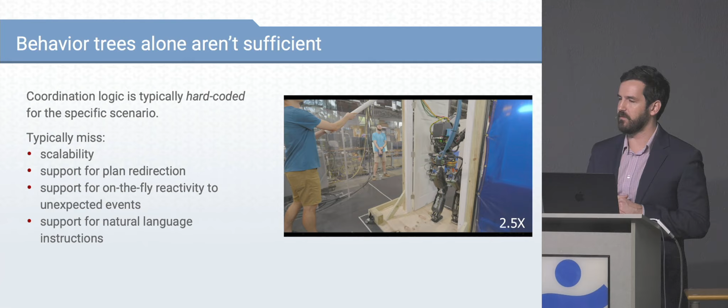But I think it's important to note that these behavior trees on their own aren't really sufficient. So I'm usually hard-coding this logic in. We talked about how you can compose them into these higher level behaviors, but now I'm having to manually program each possible transition. That's not really scalable and doesn't really model the world around us.

I want to be able to control that, but that doesn't work great if I want this big exploration of the world around. So we're trying now, and I think this is one of the things you're going to see a lot of moving forward, composition into goals and missions so that you have this understanding, but then it's how do you dictate that? It could be that missions are controlled by things like cognitive architectures, so how humans think about this, or multi-agent system coordination. And then the individual goals can be managed also with logic systems, or one of the things we tried was just LLMs.

And it's also important to note, learned policies fit into this architecture. So if I look at my tree here, I have this policy - it's nothing beyond a behavior. I can fit it right into this kind of behavior tree architecture.

I mentioned that we used LLMs for this. So here we told the robot: go behind the barricade and retrieve the charge from this person, then go place it on the door. Once you have placed it successfully on the door, walk back behind the barricade. That is the instruction we gave it. We wrote it in a text interface and said, here are the behaviors that you can do. And it took those, interpreted it, and encoded it into a set of actions for the robot to take.

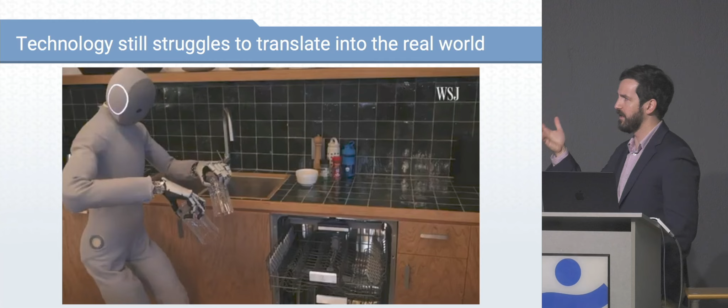But importantly, as we're kind of wrapping up, what is the actual capability of these robots? I think it's important - we've seen, especially recently, some awesome videos of people having robots do things like home tasks.

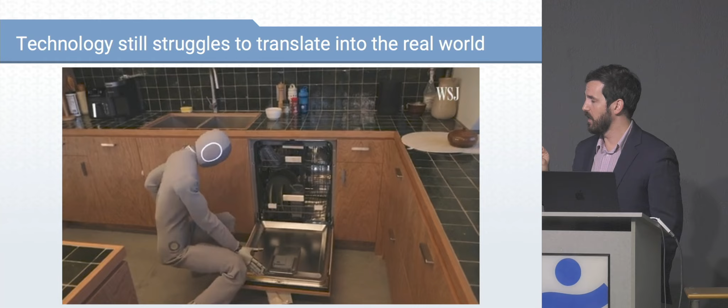This is Neo, who's trying to go into the home - and I don't want this to be considered knocking them, because what they're doing is incredible and they're trying, but it's really struggling to close this dishwasher. The thing about it is, this is not a demo that they can control - this is the Wall Street Journal coming and controlling the robot for them. That's the difference in a lot of cases with the demos you see online that are released by the companies - that's a tightly controlled environment.

I go back to the BMW manufacturing center - that's a tightly controlled environment, and they get to release the information on it. But this is what happens when an inexperienced operator, which is arguably who's going to be controlling these things in the future, tries to control it.

So if I take this information and in review - what can these robots do? Where will they be used? That was kind of the thesis statement I was trying to answer for the talk tonight. To me, there's a big question of how intelligent what we're calling artificial intelligence on these robots really is. You say, I'm using AI to control my figure robot in the BMW factory.

It has been on that site for over a month. The engineers have been tuning - you have these application engineers tuning the behavior to make it work, to do these tasks. If you vary the lighting, it may not be able to do it. That doesn't sound like true intelligence to me. I could go and bust most of the lights in this room, and that's not going to affect everybody being able to leave tonight, because we're intelligent, we're able to adapt.

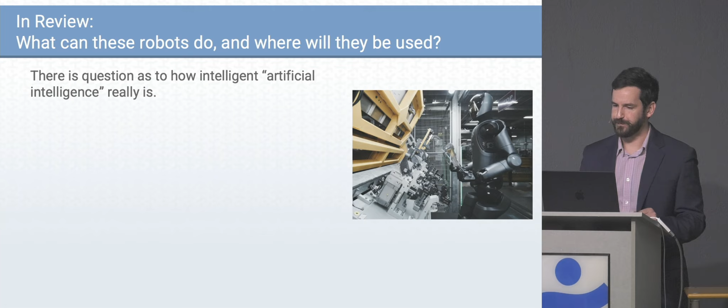Additionally, to me it's important - if you say a task is done with AI, or that a robot is using AI, that doesn't mean the problem is solved. Coming from a more model-based background, sometimes I feel like there's a bit of an indictment on what I'm working on because of that, because it's not AI - but AI isn't a magic solution. Saying you use AI, you shouldn't treat this as the problem being solved, because we just saw Neo struggle with an objectively very, very hard task for a robot to do.

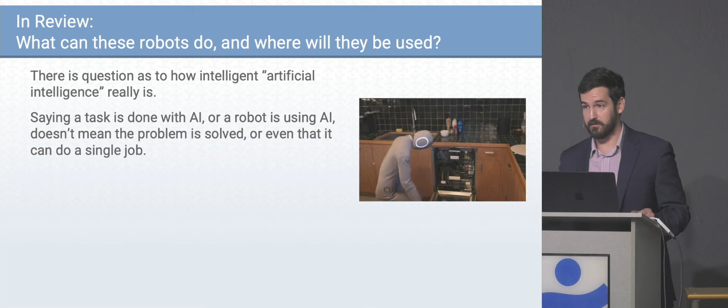So I don't want it to be like I'm making fun of them - what they're trying to do is very, very challenging, particularly having somebody use it who wasn't part of their company. And I think if we take both of those in context and ask, well, what can they do - they need these really well-defined tasks, and importantly, they need tasks where you can capture the data for how those tasks are done.

So again, operating on site at a BMW factory for a month, I can get a whole lot of data on how to do it, and that will help me know how to do this kind of task in the future. So we're not Rosie the robot from the Jetsons. With that in context, tasks like tote moving make a lot more sense, because I can get a lot of data on that and I can define that task tightly.

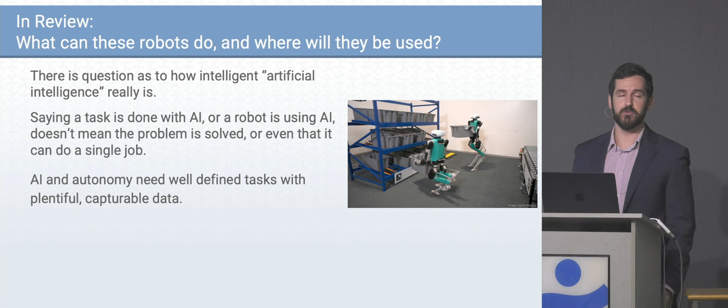And so I can execute that reliably and deliver real value to a customer. We're actually pretty close to that, as we've shown. And when people talk about how to use robots, what they often talk about are the dull, dirty, and dangerous - the 3Ds. And to me, the inarguable case of this is the dangerous task. That's really what we focus on at IHMC.

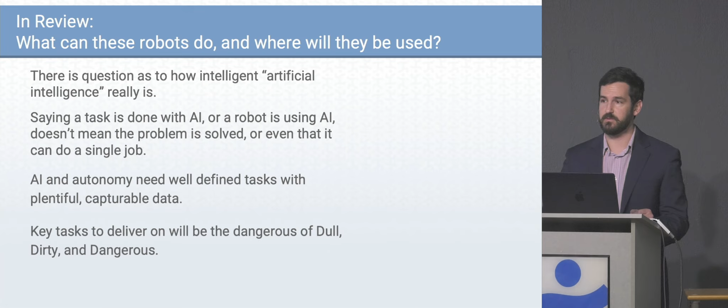The challenge with that is if I talk about a bomb disposal robot, there aren't a lot of those needed in the world. Police departments aren't buying a lot of bomb disposal robots, and it takes a lot of money to develop these types of systems. So that's why we're having to focus on more broad applications first.

But the thing you're going to see is things like bomb disposal - in my opinion, this is going to be something you don't want people doing, period. And you can't just use a different type of robot to do it.

Another example is confined space entry. So if you think about going in and doing an inspection on a chemical tank, that's really, really hard to make a robot move around in. And if I'm sending a person in, that person's getting hazard pay, as are the four people making sure they're staying safe during that task. So it's very expensive - that actually could be a real market for these types of things.

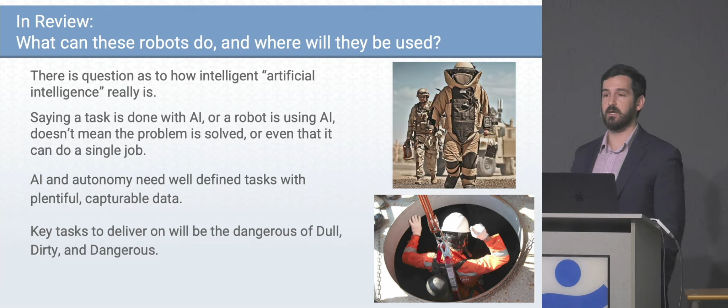And I think that when we're through the robotics hype, it may be that we do see home robotics. I don't know - I have some skepticism as to the safety of that in the long term and whether it's going to be viable because of that. But what I don't think is arguable is that we're going to see a lot of our dangerous tasks being taken away from people, because people really shouldn't be doing these to begin with. They're just our only option now.

And with that, I'm going to close with a video from also the tech park, but us beginning to take Alex out and be able to show it. We can have this play in the background while I answer any questions. Thank you all very much for listening tonight.

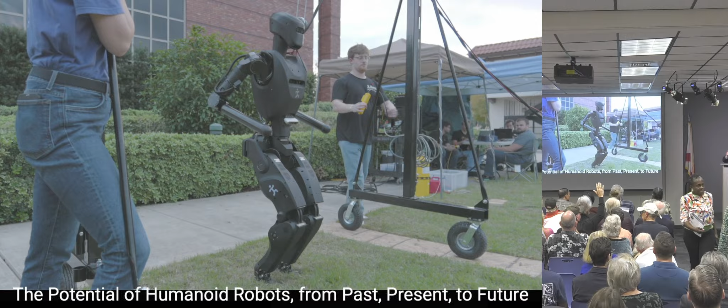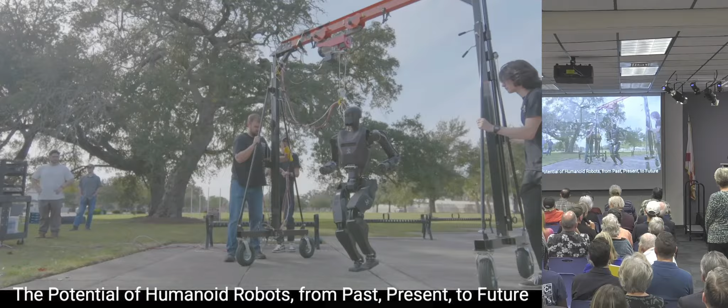So we have a microphone coming. I think your hand was up first. I feel like there's going to be a lot of questions tonight, so I'm sorry if I don't manage to get to you. In recent years, there's been a lot of publicity about whether robots should be humanoid or not. You've read articles about that, I'm sure, and studied that. What is your view of the future?

I think that's a tough question to answer. I think there are some tasks that I'm not convinced you're going to be able to get away from something with human-like mobility for doing them. Again, that goes back to the dangerous ones. But I think there's a lot of things you have to look at from a performance perspective to say whether or not you should be using wheels.

To me, carrying heavy objects - I'm already having to carry the weight of the robot with these legged systems. If I can just use wheels where I don't have to worry about that, put giant batteries in the base, that simplifies the problem a lot. And if all I have to do is manipulate in a less hard workspace environment, I think we're likely to see those replace what they call AMRs - autonomous mobile robots.

I think you're going to see a lot more AMR solutions than you do bipeds. But I think bipeds do a really good job of capturing the imagination. So it's a very good thing to be able to tell a story about, which is important for fundraising as an example. That's why you're seeing a lot of that getting captured right now for it. My big concern, though, is how many of these good solutions are we not seeing because the money is going towards humanoids - which is somewhat of a thing I shouldn't say as somebody who works on humanoids.

Let's go right here next, and then we'll try and work our way back. How much do y'all use AI to be translator, communicator with these robots?

Yeah, so that's a great question. We don't use it a ton in a lot of the work we do. You did see an example of that with that charge placing - there, I'm typing in, and it's figuring out what to do for that. We're also using it more and more in writing the software, but that's a challenge as well because somebody has to edit that - often it's me, unfortunately. But I think you're going to see that more and more happen, particularly as you start to do more natural language processing, as long as you can make sure the output obeys what the robot is capable of. That's one of the big open research challenges.